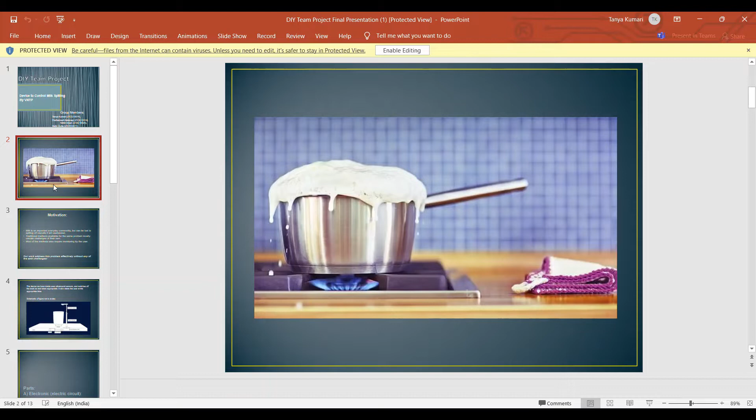Over the years, numerous methods have come to the fore and various ways have been visualized, but they have problems of their own. This is where our work makes its mark. Our device uses sensor-based technology to identify the point of milk about to spill and automatically switch off the knob. Not only does it remove the need of constant monitoring, but it also acts as an alarm to alert the user of the spilling point.

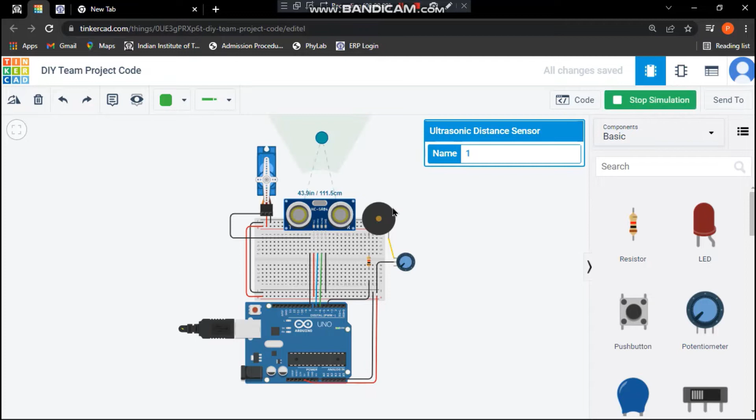This is the simulation of the Arduino part of our project. So when the distance between the cream of the milk and the ultrasonic distance sensor is greater than the specified distance, at that time the motor would be rotated to 180 degrees and would be stationary, and the piezo speaker would be turned off.

As the cream of the milk rises and decreases the distance between the ultrasonic sensor and the cream layer itself, it would trigger the ultrasonic sensor and would in turn trigger this servo motor to rotate by 90 degrees in clockwise direction, hence turning off the gas knob, and would also turn on the piezo speaker, alerting its user that the milk is about to spill.

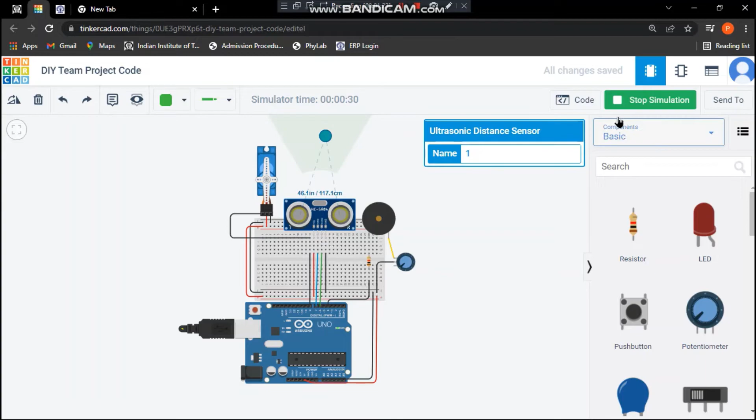Here are the mechanical parts of the whole system. This part is called the primary cylinder and it will support the whole system, and it also has a groove to withdraw any sorts of wires. The secondary cylinder contains screw holes for the screw to pass through both the cylinders. This is the screw itself which will pass through both the cylinders and will keep the height fixed.

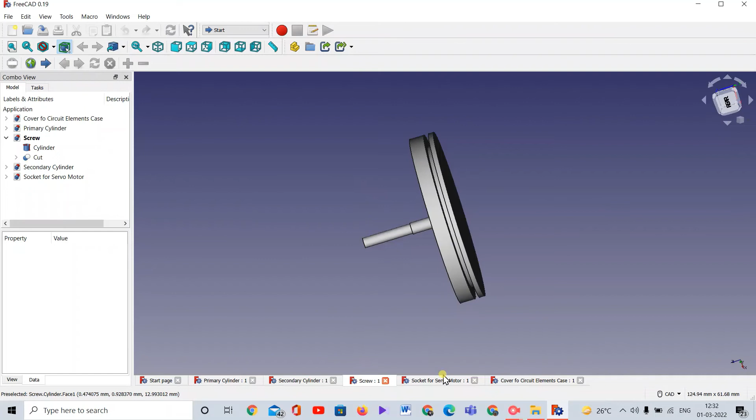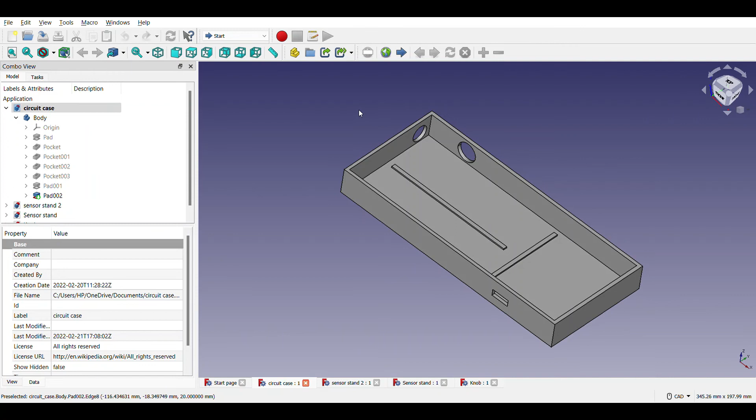The socket for the servo motor will contain the servo motor and contains a hole which will allow us to withdraw any cables from the servo motor. This is a cover for the circuit elements and its dimensions have been set according to the case of the circuit elements. So this is the circuit case which contains Arduino Uno, breadboard and the piezo speaker.

This is the sensor stand which supports the ultrasonic sensor. This is a cover which protects the ultrasonic sensor from the back. And this is a customized knob which is made to get fixed into the stove's knob. And these holes provide path for the strings to get connected to the servo motor for the purpose of rotation.